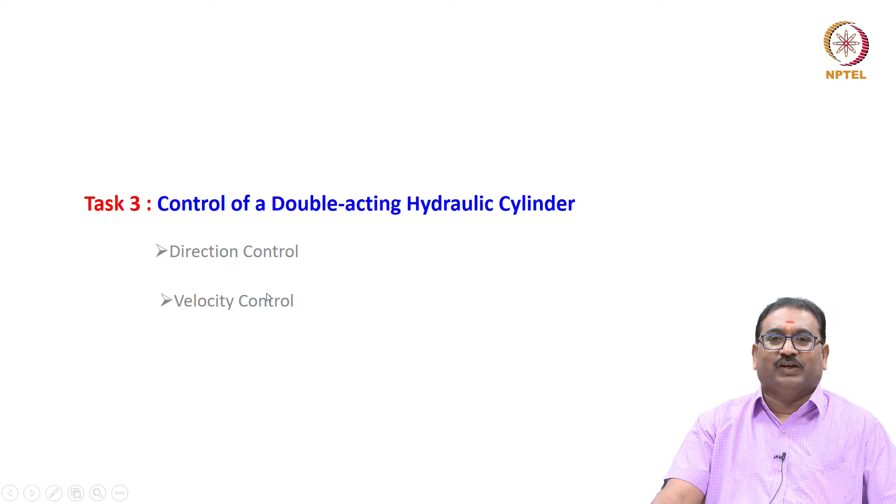Now you are seeing the many ways to control the single acting cylinder direction as well as the speed using the flow control valve and the metering valves. Now we will quickly glance at the double acting cylinder, how to control the direction as well as the velocity.

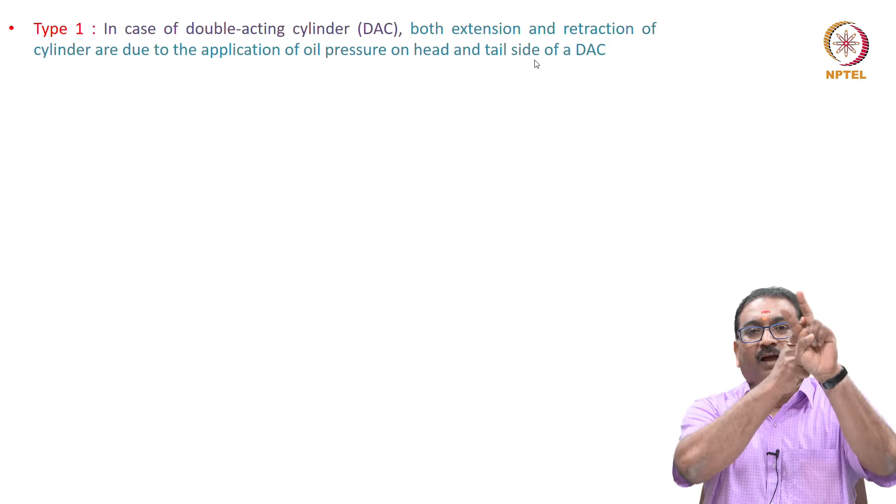Type 1 case. In a double acting cylinder, both extension and retraction are due to the application of oil pressure on the head side and tail side of the DAC. Previously I was using only the head side fluid pressure. Now in the double acting cylinder there are two ports. One port is used as the inlet, the other as the return. Sometimes this is an inlet, this is an outlet, meaning fluid flows in and out through the ports for extension and retraction using fluid pressure.

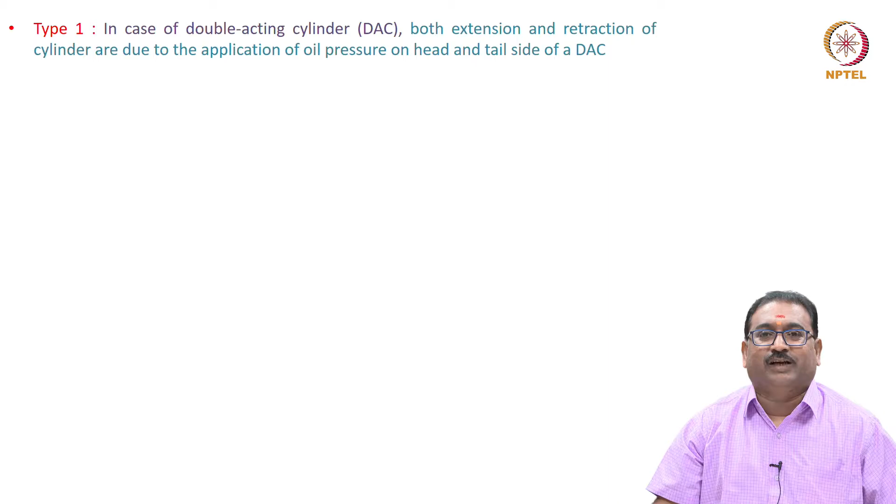Now let us see how the circuit looks. Always draw the circuit in the null position, meaning the cylinder is in the retracted position. You will see the crossed configuration as the null. Here P is connecting to B, meaning the pump flow is coming to the tail side. Whatever fluid is at the head side passes through here and goes to the tank, meaning it is retracting. I am using the 4/2 DCV for this.

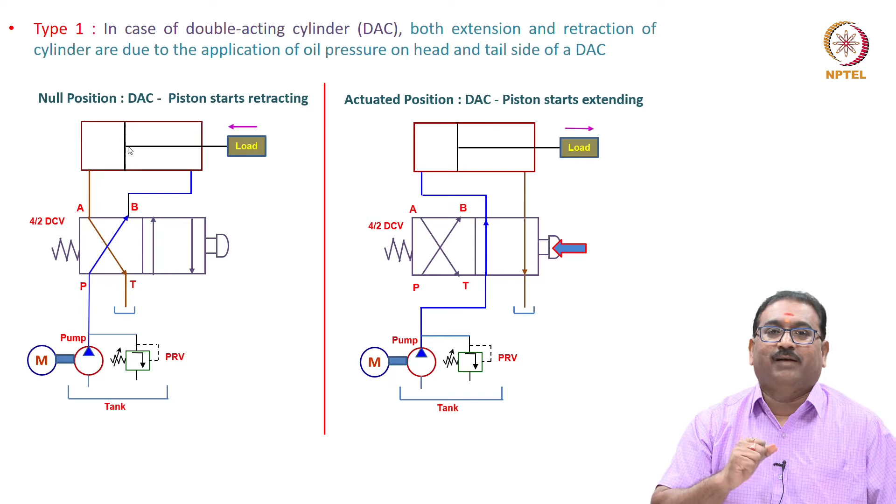Similarly, when you press this, the pump flow connects to the head side. Whatever flow is at the tail side goes to the tank. Very simple. Press again, it shifts to the left position of the DCV, and it retracts again. For every instant of time it will extend or retract. Hold position is not possible here, meaning I cannot stop the actuator at a certain distance using a 4/2 DCV.

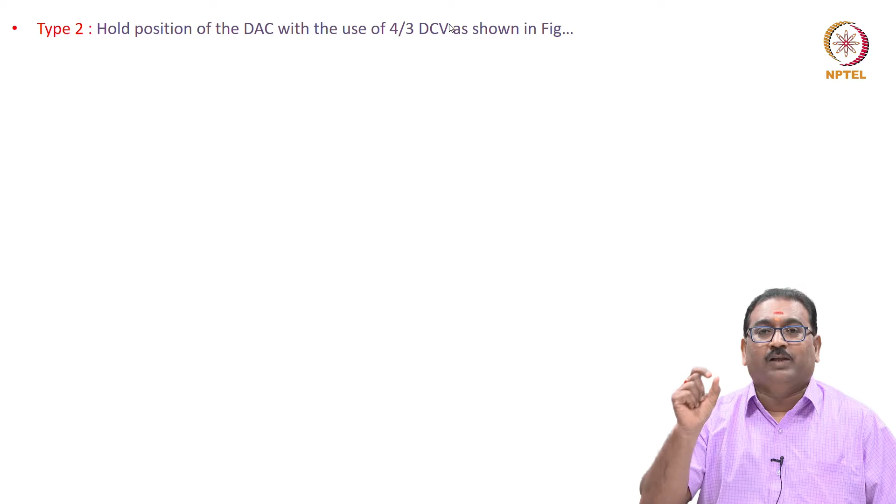How will we achieve this? By using the 4/3 DCV. The middle position plays a major role to hold the actuator in any position. Here I am using the middle position where the A and B ports are blocked, and P is connecting to T, meaning it is a tandem neutral. You have seen the different types of neutrals while studying the direction control valve.

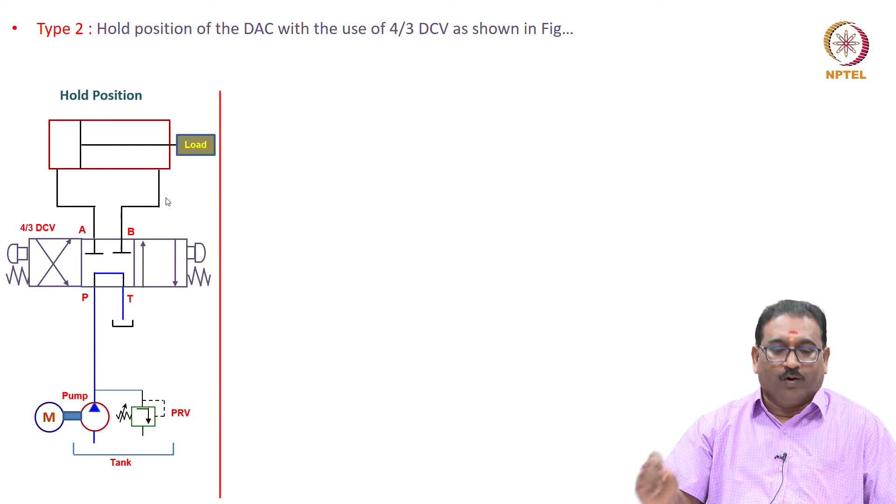Now I want to hold the actuator in any position, for example at 10mm, 20mm, or 30mm if the stroke length is 200mm. In the previous case, using a 4/2 DCV, this is not possible — it will either completely extend or completely retract. Holding the actuator at different positions is only possible with the 4/3 DCV. Now you will see this is the null position.

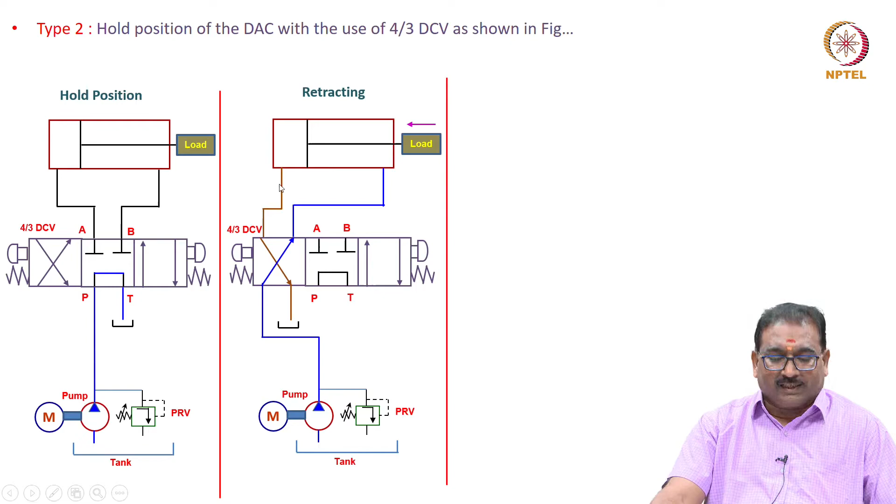This is achieved using two stiff springs. When I operate the left button, the pump flow comes to the tail side, and oil from the head side goes to the tank — it is retracted. For extension, if I press the right actuation button, the pump flow goes to the head side, and flow from the tail side goes to the tank, meaning the cylinder is extending. Once you press it again, make sure it always returns to the middle position.

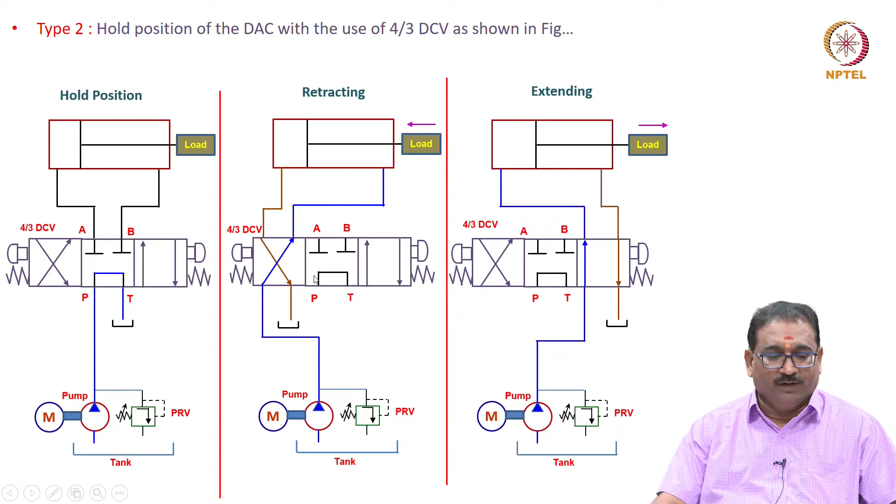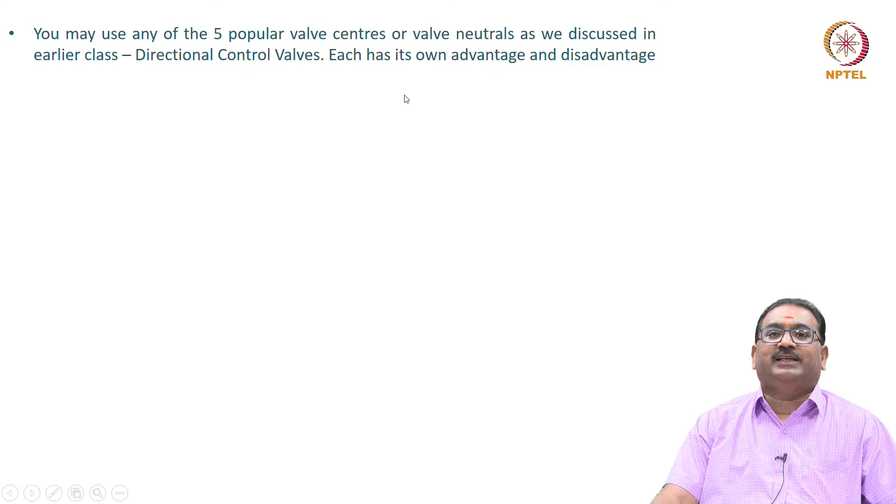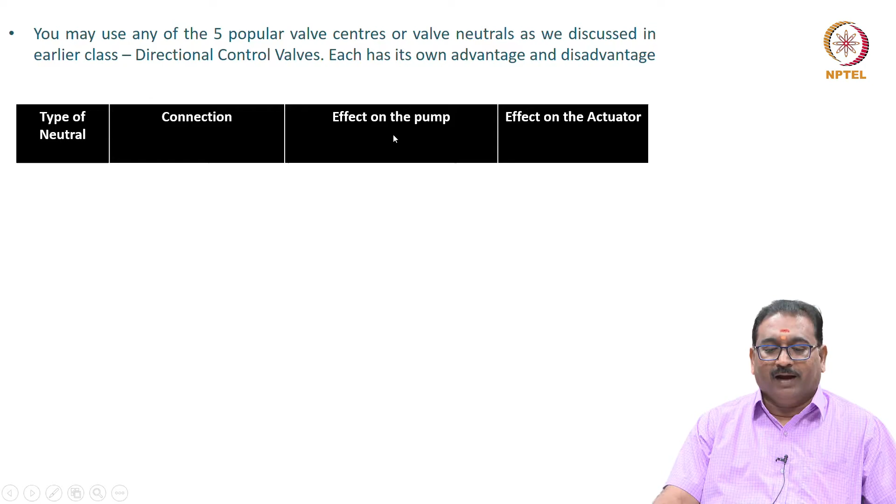You may use any of the 5 popular valve centers, or valve neutrals, as we discussed in the earlier class on directional control valves. Each has its own advantages and disadvantages. I am showing you the different types of neutrals here quickly for your glance — the port connections in the middle, and the effect on the pump and on the actuator in the middle position.

Closed center — the name itself tells us that the pressure port, tank port, A and B ports are all blocked. When this happens, a PRV is a must, because in the middle position the pressure starts building, and hence the PRV is required to divert the flow from the pump to the tank. The actuators are in the hold position.

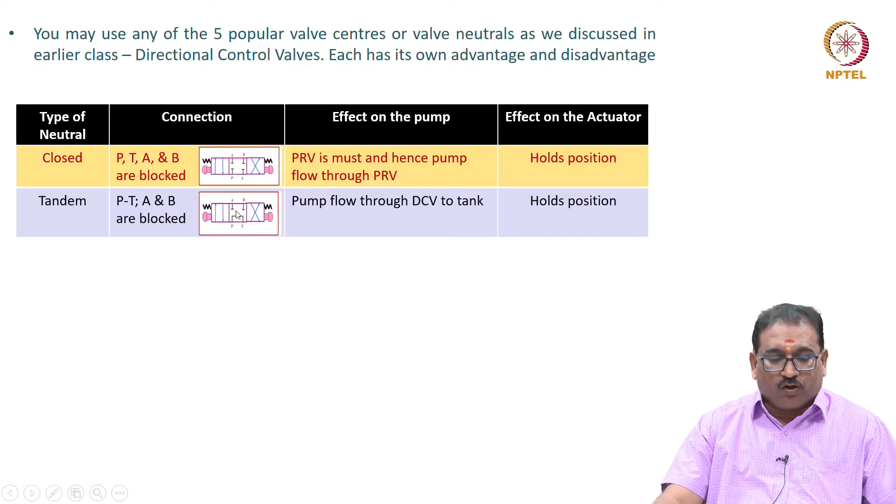In the tandem neutral, P is connecting to T, so pressure will not build in the pump because P is connected to the tank in the middle position. But the actuator ports are blocked, so they remain in the hold position.

In the float center, A and B are connecting to the tank. No need to worry for the actuator. Anytime it will stop in the middle position, both oil will connect to the tank, meaning low pressure, 1 bar pressure. But PRV is required because the pressure port is blocked in the middle position.

One more is there, open center. No need to worry for the actuator and pressure as well as the pump, because all are connected in the middle position. The actuator will float also here, as shown in the floating center.

Regenerative, very important. In the middle position, P, A, B are connected. T is blocked here, meaning regenerative is when I move from one position to another, middle position - what happens? The extra fluid from the rod side is added to the pump and then used along with the pump flow to extend further.

Meaning, what is regenerative? Used fluid is used to increase the velocity of the actuator. That is why the actuator extends quickly but with less force capability, because more flow rate is coming from the pump as well as the return flow, since it is connected here.

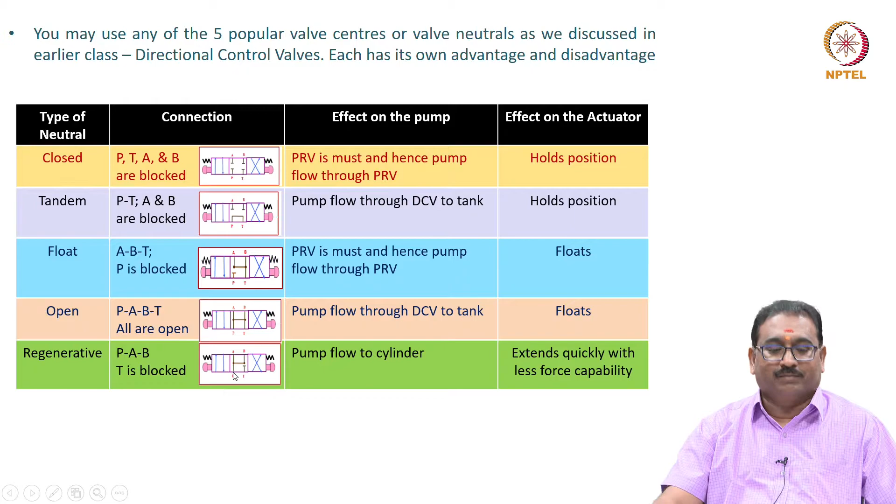Now we have seen in the double acting cylinder how to change direction and hold position using different types of valve centers. Now I want to control the actuator speed either in the forward direction or the return direction. For that, you have to control either the inflow or the outflow. There are many combinations, and I will show you one by one.

Now, controlling the speed of the double acting cylinder by metering the flow into the actuator, meaning a meter-in circuit. Quickly I will show you the circuit in the null position. Here you see a single rod double acting cylinder. Again, I am using the flow control valve to control the inflow at the head side. This is a 4/3 DCV with push button actuation, spring returns to the middle position, and the middle position is the tandem neutral. You may use any type, but for easy understanding I will use the same type of centers in all the slides.

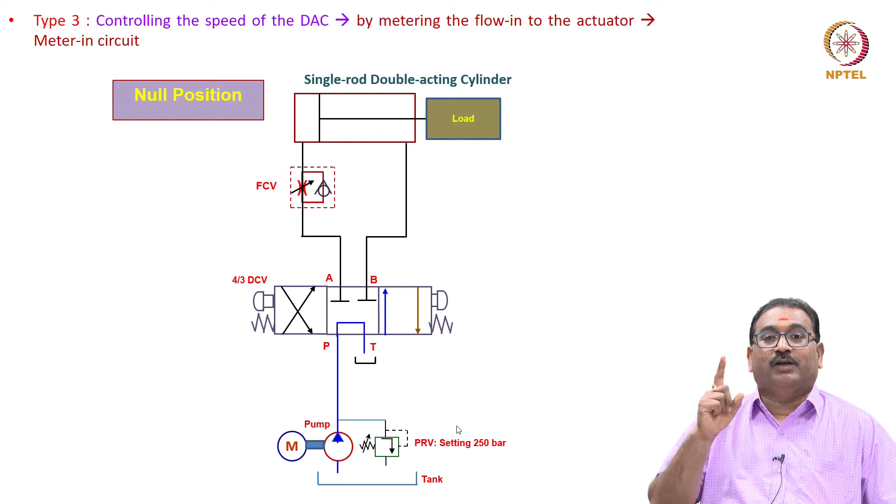The power pack remains the same here. You will see now how it operates. Now I am able to control only the inflow, not the outflow. Now we will see the different actuation positions.

If I operate the right actuation, because I want to extend now from the null position, we will see the pump flow is coming here and going here. It will not pass through the check valve because of its position. It will only pass through the throttle valve, then to the head side, meaning I am controlling the flow into the actuator. Then it moves with the required velocity.

Then when you actuate the left side push button, the pump flow comes here and goes to the rod end, pushing whatever fluid is at the head side out. The check valve opens, then it goes to the tank, meaning the outflow is not controlled in the return direction.

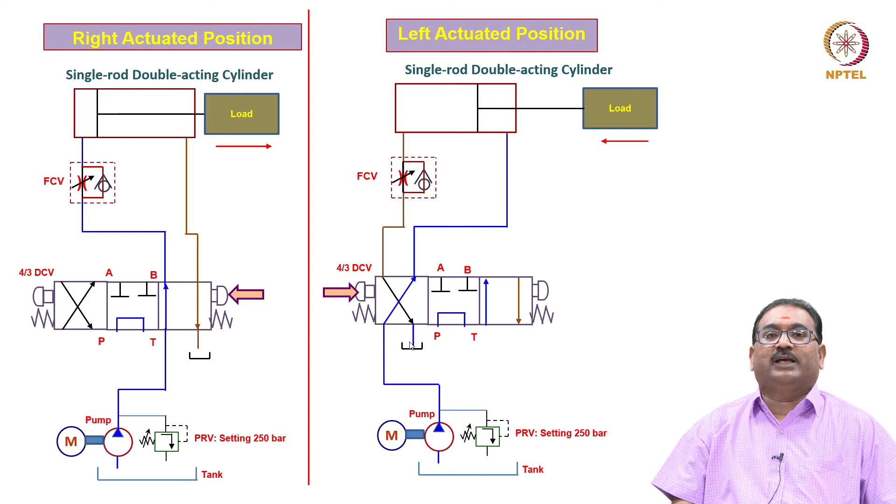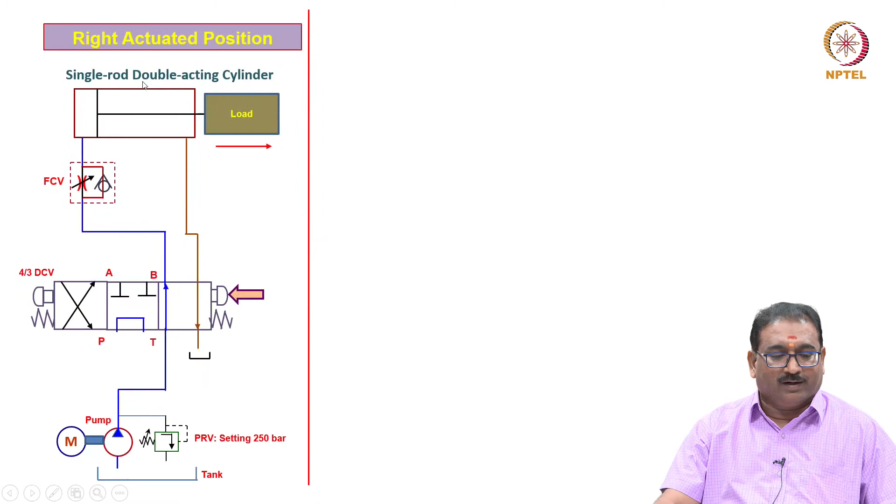So I am controlling only the inflow to the actuator during extension. Such circuits are known as meter-in circuits. Now we will see one more case - type 3 is over, this is type 4, I will show you.

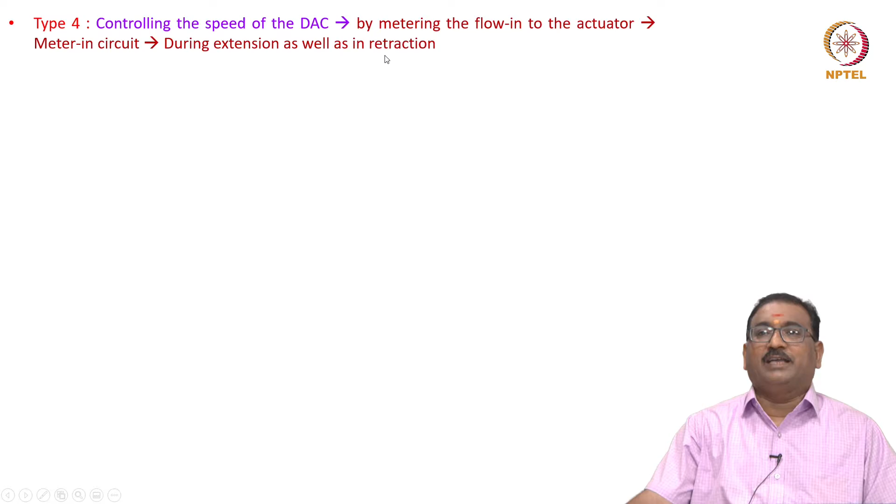Now we move on to controlling the double acting cylinder by metering the flow into the actuator - meter-in circuit - during both extension and retraction. As always, in the null condition, this is the circuit.

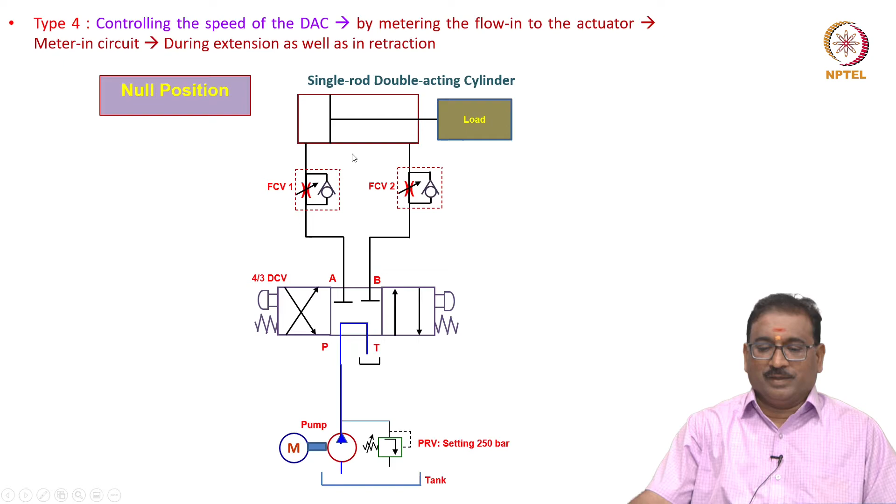When I press the right side button of the DCV, the flow from the pump goes to the head side through the metered orifice, and the piston starts moving to the right side.

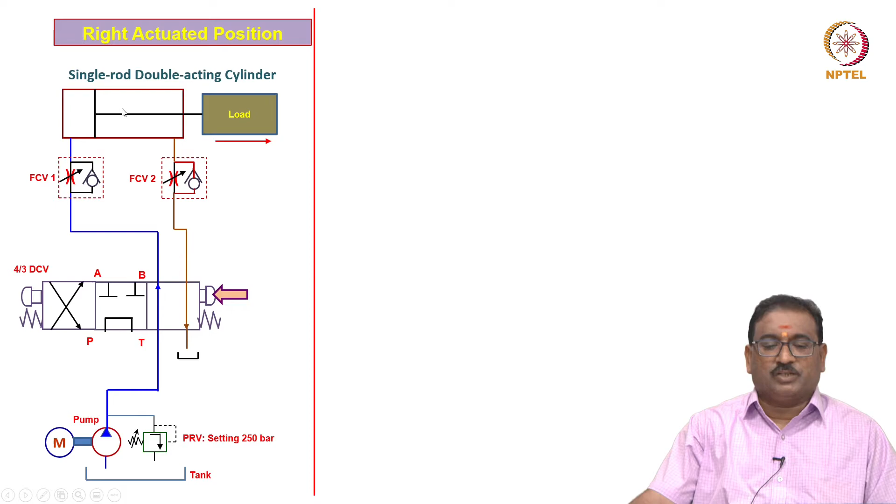When you press the left side of the DCV, what happens? It jumps to the crossed configuration. The pump flow goes to the tail end or rod end, again through the metered orifice, meaning in both conditions the flow entering the actuator is controlled, and the flow at the head side is bypassed through the check valve.

Correct, in both cases, whether you operate the right actuation or the left actuation, only the metered inflow is controlled and the outflow is bypassed through the check valve.

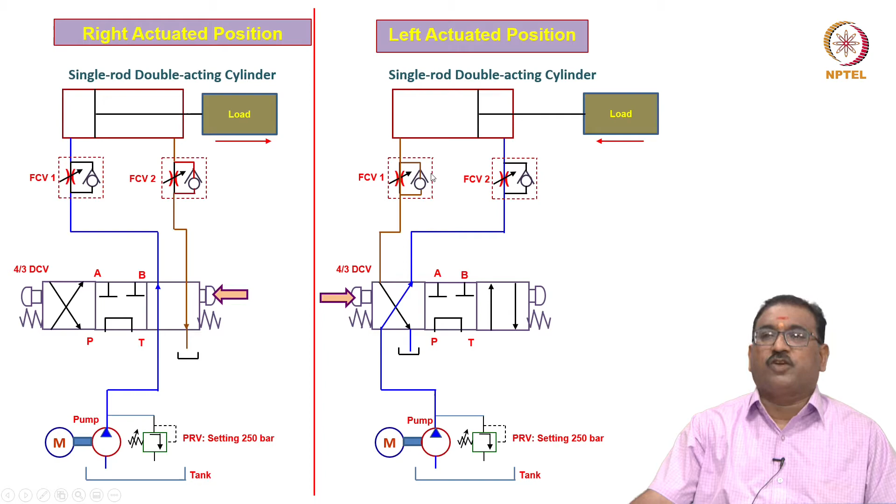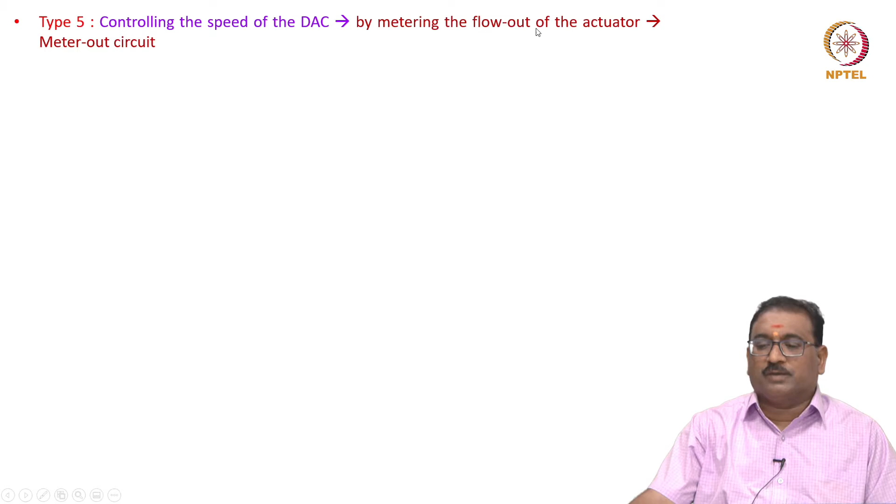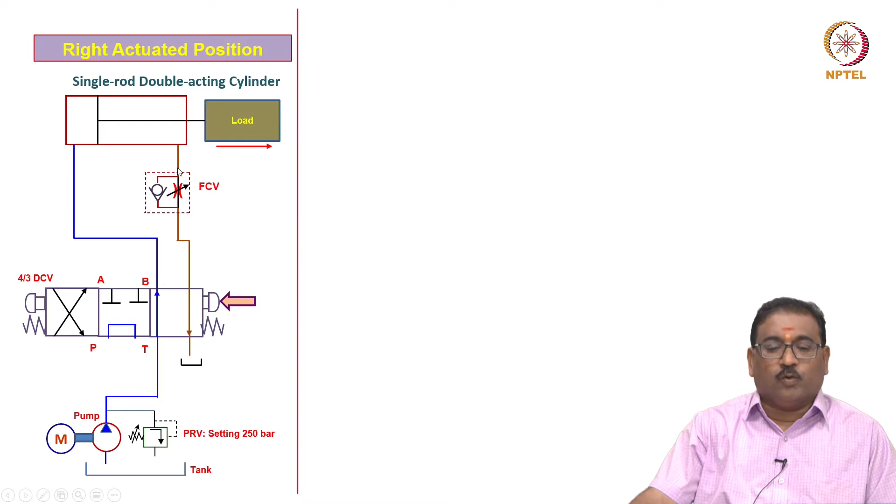Now we will see again type 5, controlling the speed of the double acting cylinder by metering the flow out of the actuator. This is a meter out circuit. The null condition looks the same, but I am placing the flow control valve at the tail end, meaning the rod side. Now actuated position right side, the pump flow is exposed to the head side, the tail end is only controlled through the orifice.

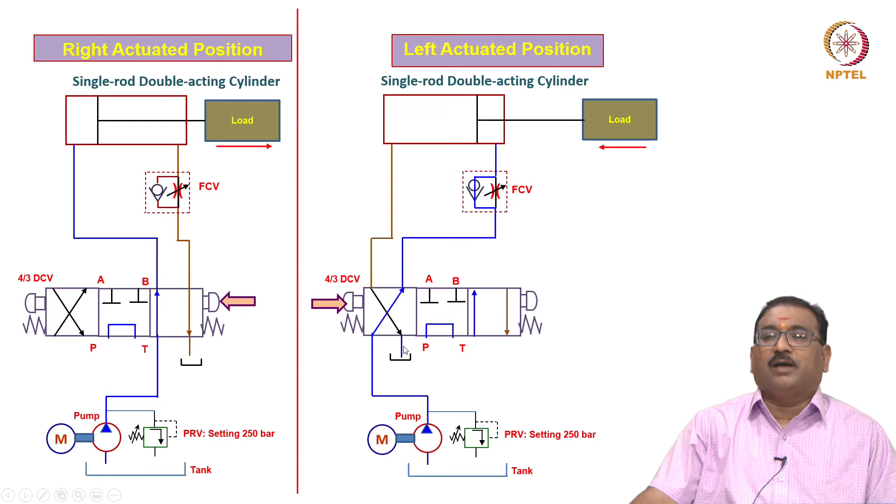When you press the left hand side of the DCV, the pump flow comes to the tail side, meaning rod end, through the bypassing check valve, and the flow from the head side goes to the tank directly.

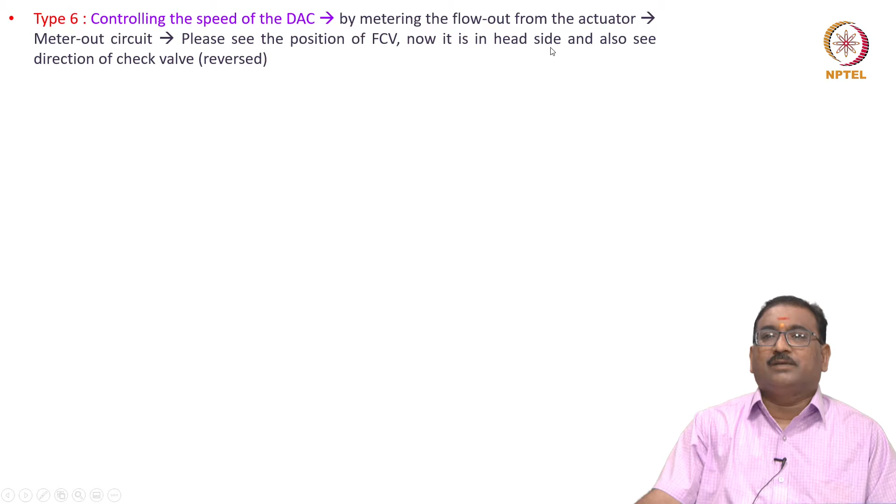Now type 6, controlling the speed of the double acting cylinder by metering the flow out from the actuator. Again we will draw the meter out circuit, but see the position of the FCV how I placed it. Now it is on the head side, and also see the direction of the check valve. Now we will see how it operates.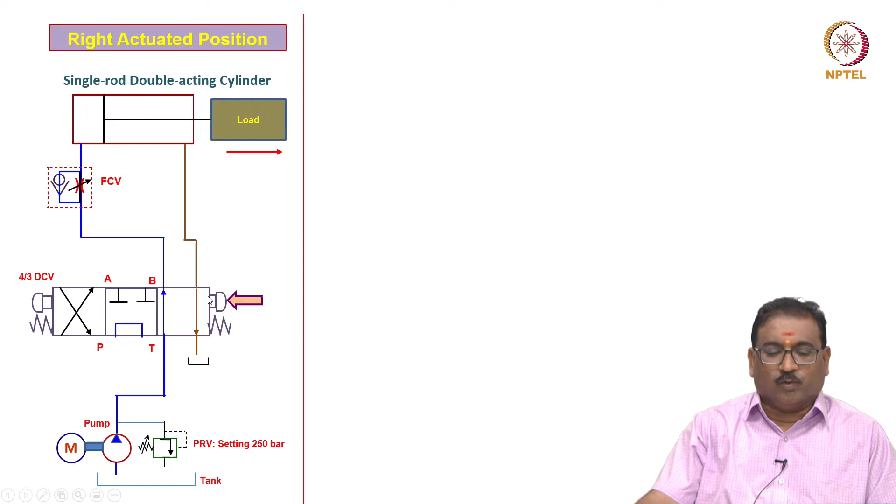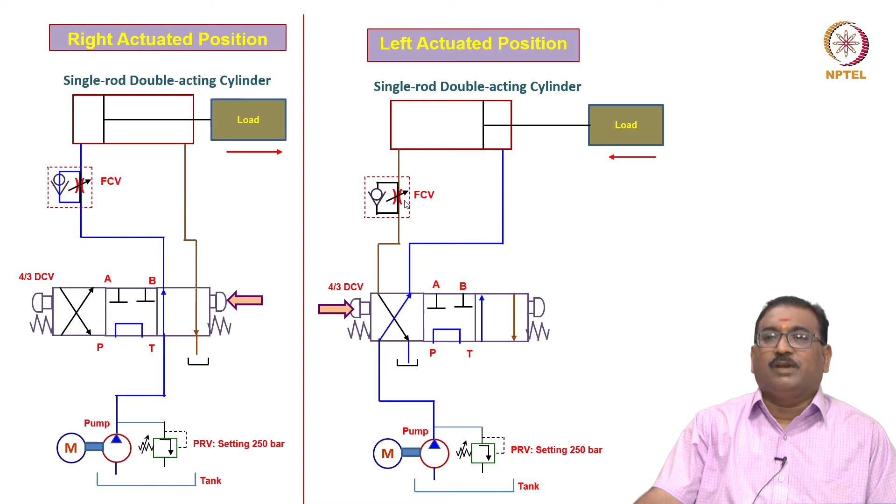Now when we press the left side of the DCV, the flow comes to the tail side as free flow, whatever pump flow is coming here, and the actuator moves to the left side. Then the flow exiting at the head side will pass through the metered orifice, meaning the outflow is controlled. This is similar to the previous one, but here I placed the FCV at the head side, controlling the outflow only.

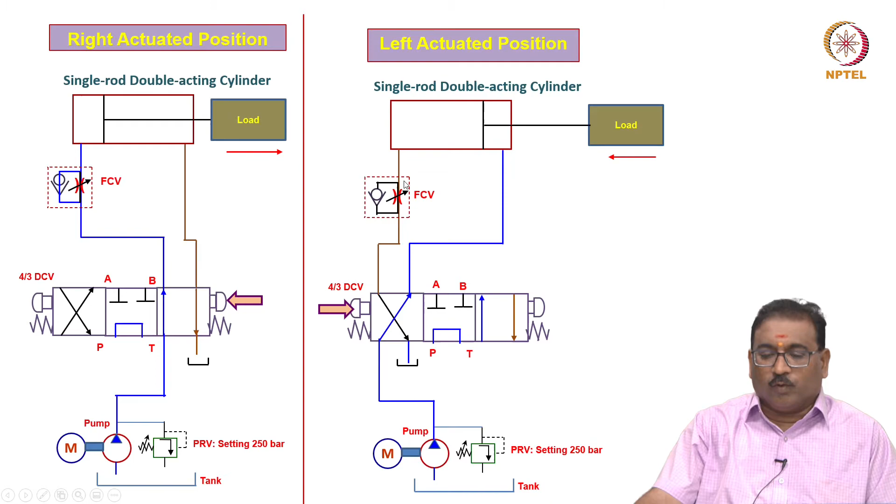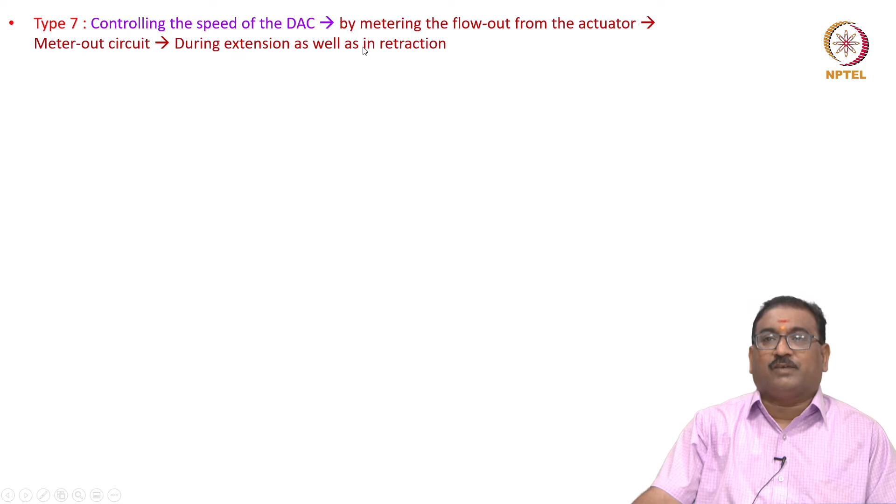Now we will see type 7, how we control the double acting cylinder by metering the flow out from the actuator, again meter out during extension as well as retraction. How do we do this? As we already know, I am using two flow control valves, one at the head side and one at the tail side.

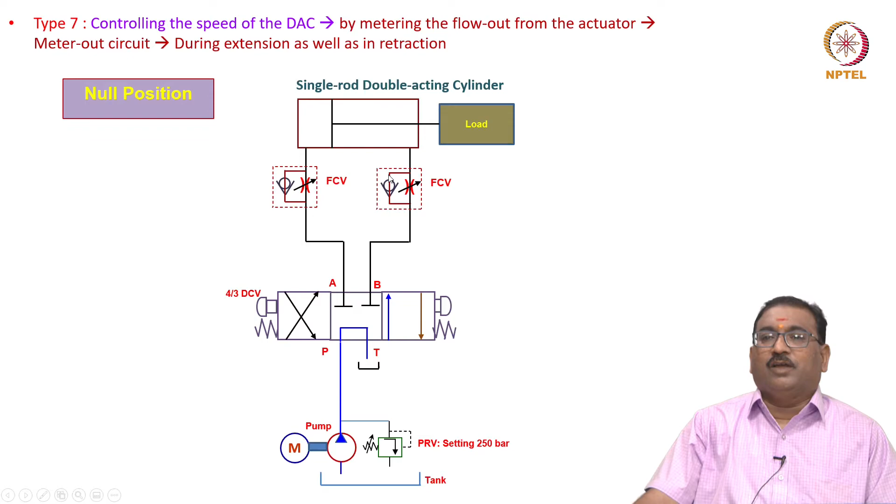Now let's see by operation when I press the right side actuation how the flow takes place. From the pump it goes to the head side with no control, because it is bypassed through the check valve. When the piston moves to extend, the flow is only passed through the metered orifice. So speed is controlled here, outflow is controlled here.

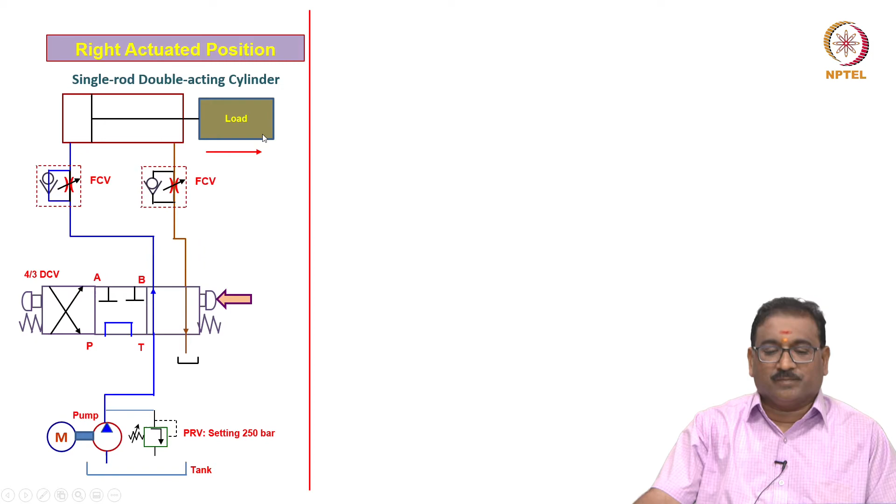Now we press the left side button. What happens? The pump flow is coming to the tail side, bypassed through the check valve. Whatever flow is there in the head side will pass through the metered orifice. Again the speed is controlled both on the forward as well as the return side.

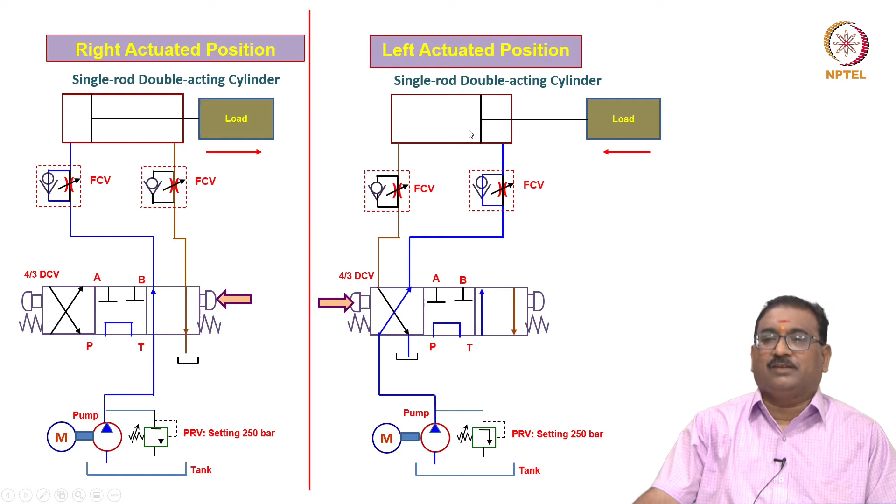Now let us see very quickly, friends, regenerative circuits. Regenerative circuits are very much essential when we are supporting the pump flow during the extension, and how we are placing the valves.

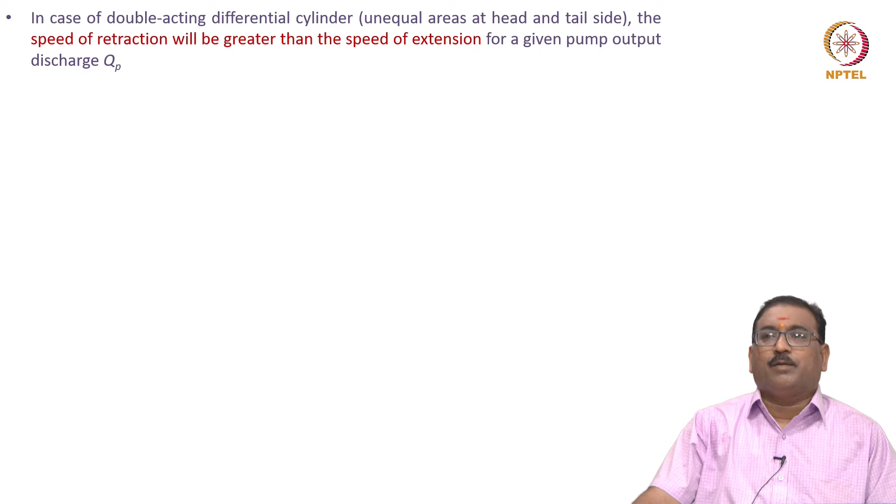Now we will see, in case of the double acting differential cylinder, meaning unequal areas at the head and tail side, the speed of retraction will be greater than the speed of extension for a given pump output discharge QP.

This is because the effective area of the piston surface is smaller on the rod end side than the cap end.

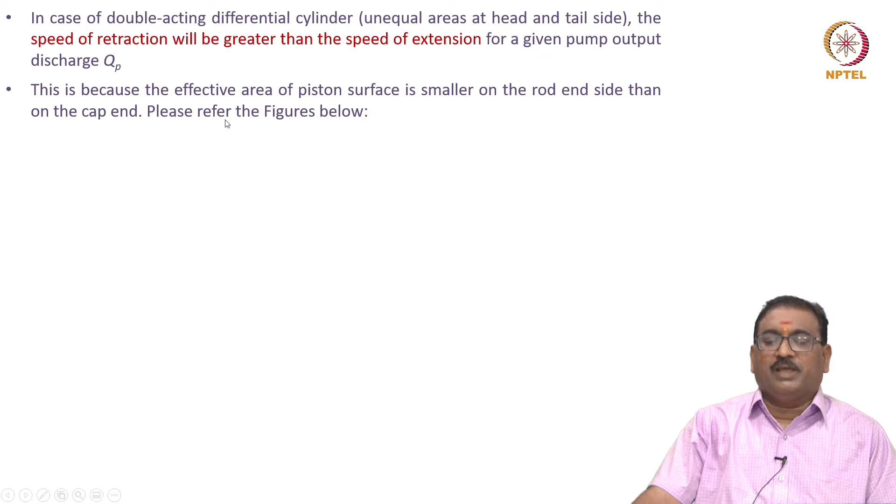Please refer to the figure below, I am showing you the differential area. When the fluid is coming to the head side, this is the effective area, the piston area pi by 4 dP square, during the forward direction. During retraction, the effective area the fluid is exposed to is the rod area, so you have to subtract it, meaning pi by 4 dP square minus dr square.

During extension, the complete pump flow divided by the area of the piston gives the extension velocity. During retraction, the complete pump flow divided by the effective area AR, which is pi by 4 dP square minus dr square, gives the retraction velocity.

Please note, friends, areas are like this: AP is greater than AR. So the velocity of retraction is more than the velocity of extension.

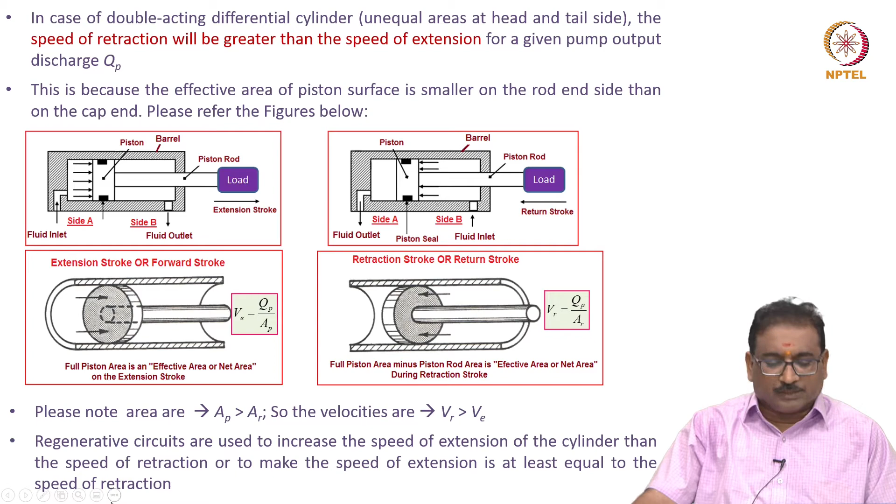Regenerative circuits are used to increase the speed of extension of the cylinder compared to the speed of retraction, or to make the speed of extension at least equal to the speed of retraction. To increase the speed of extension, the discharge flow from the rod end is passed to the head side instead of sending it back to the tank.

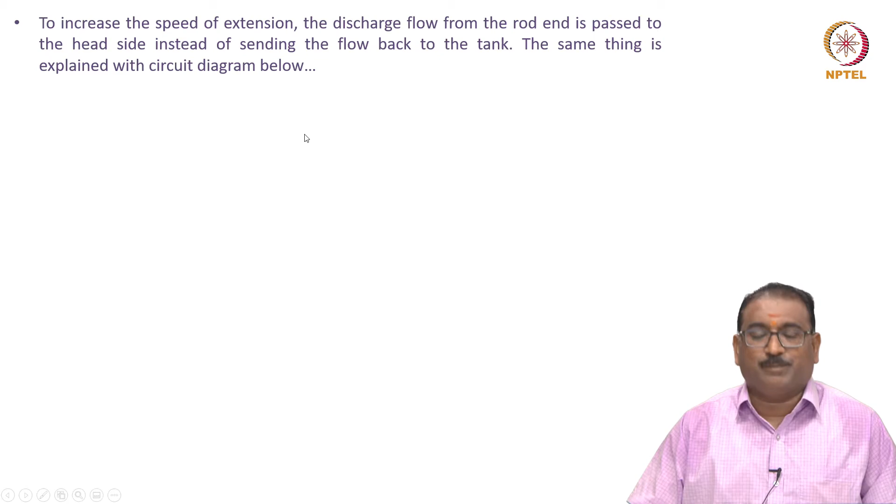The same thing is explained with the circuit diagram below. Let us consider the circuit: this is a double acting cylinder connected to the DCV, a 4/3 DCV with closed center.

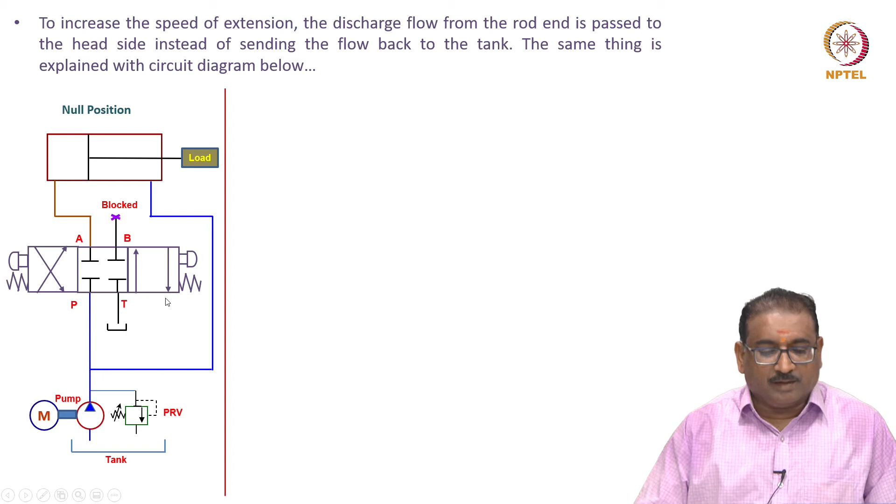Here pump is connected to the middle position and A port is connected to the head side. B is blocked here. Then B of the double acting cylinder is connected directly to the pump line here.

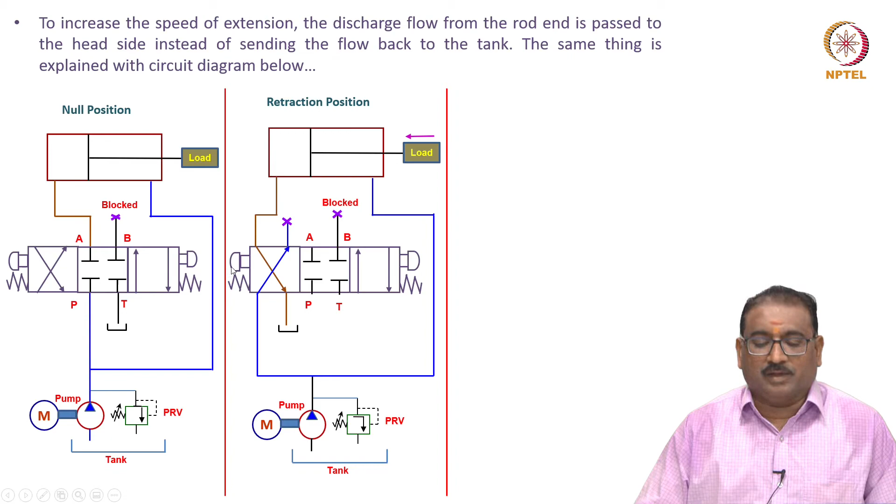Now let us see what happens in the actuated position. When I operate the left side DCV push button, the pump flow is coming here and it will block here, but it will go to the tail side of the double acting cylinder through this. Then the piston is retracting.

Whatever fluid is there will go here and then to the tank. When you actuate the right push button, you will see the pump line will come here, and it will go to the head side.

Now, when the piston starts moving, whatever fluid is there at the rod end will come here and then join the pump line. See here friends, it adds here. Then what happens? Extension speed will be increased because of the pump flow plus the flow from the rod end.

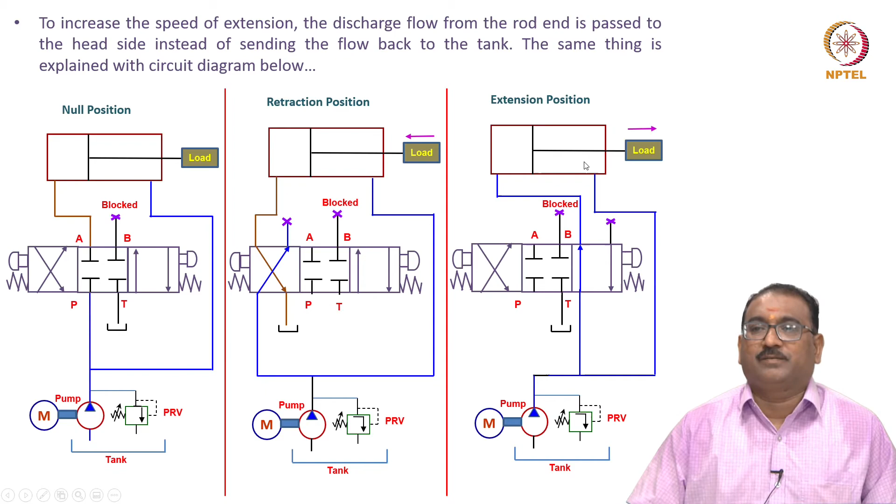This I will explain to you, how to mathematically calculate this regeneration. The equation for the extending speed can be obtained as follows.

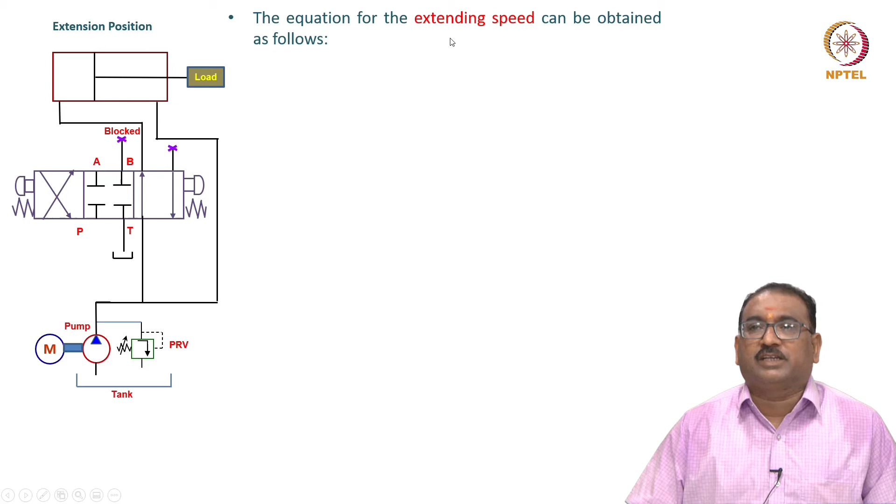As we already know, the total flow rate entering the blank end of the cylinder equals the pump flow rate plus the regenerative flow rate coming from the rod end of the cylinder. So Q total equals what? QP, pump flow, plus flow from the rod end, QR.

Solving for the pump flow, QP equals what? QP equals QT minus QR. So we know that the total flow rate equals the piston area multiplied by the extension speed of the piston.

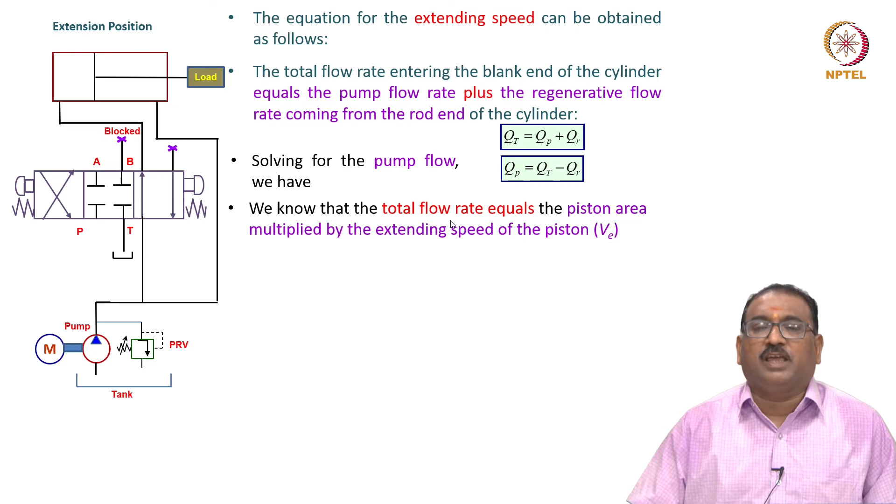Meaning Q equals A into V, correct friends? Similarly, the regenerative flow rate equals the difference of the piston and rod area, meaning AP minus AR, multiplied by the extension speed of the piston.

Substituting these two relationships into the preceding equations yields QP equals what? AP into VE minus AP minus AR into VE, correct?

Now what will we do? You will open the bracket here, then you will get QP equals, because this AP VE gets cancelled, we will get only QP equals AR into VE.

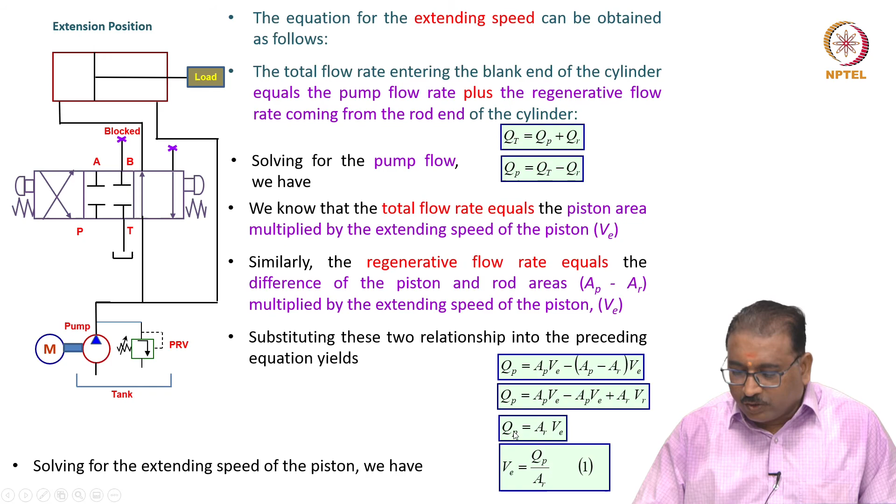See friends, solving for the extending speed of the piston, we have VE equals QP by AR. Let us call this equation number 1.

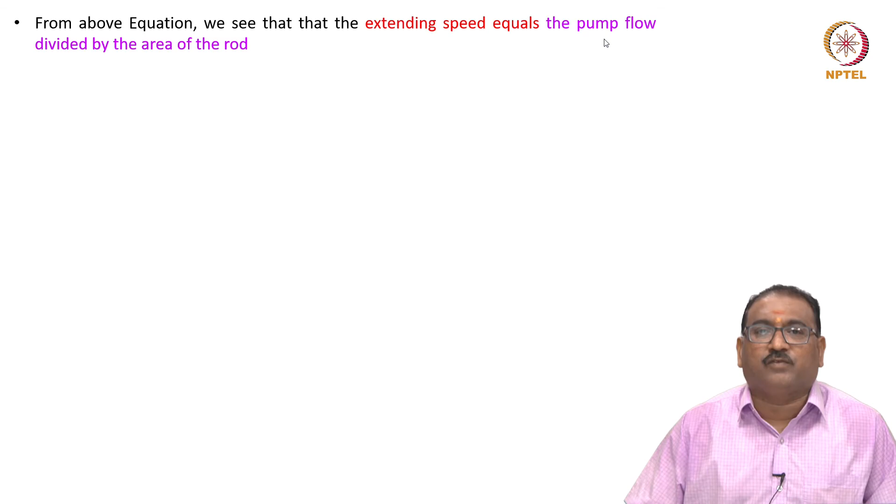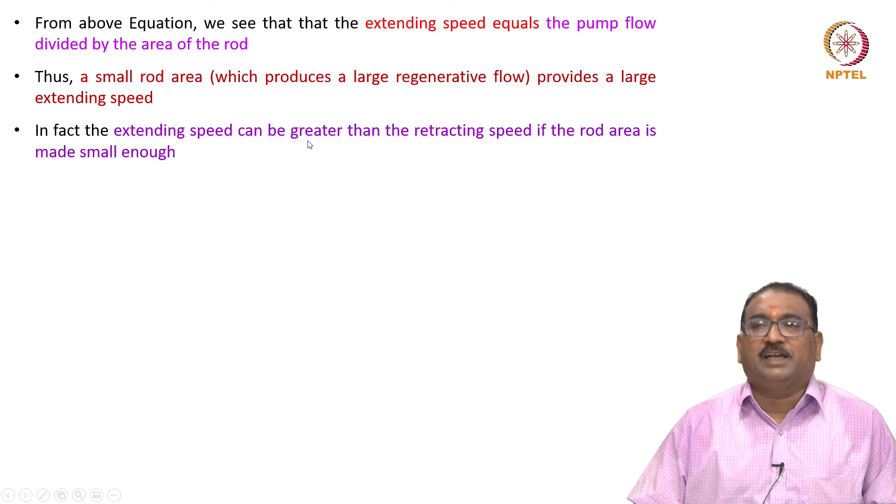From the equation, we can see that the extending speed equals the pump flow divided by the area of the rod. Thus, a small rod area which produces a large regenerative flow provides a large extending speed. In fact, the extending speed can be greater than the retraction speed if the rod area is made small enough.

Let us find the ratio of extending and retracting speeds to determine under what condition the extending and retracting speeds are equal. Let us see now.

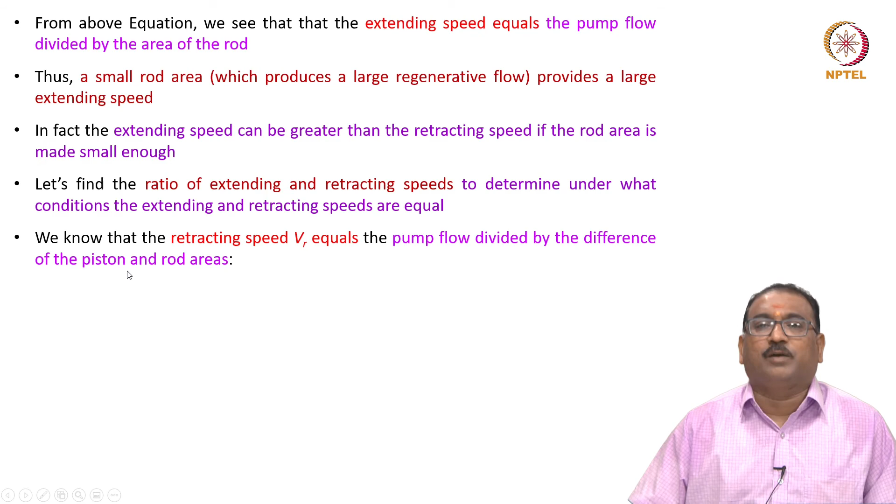We know that the retraction speed VR equals the pump flow divided by the difference of the piston and rod areas. Already we know VR equals QP by AP minus AR. Let us call this equation number 2.

Now we have to take the speed ratio. Already we know velocity for extension and velocity for retraction, QP by AR and QP by AP minus AR. Then QP gets cancelled, then this term will go up, AP minus AR by AR.

So upon further simplification, we obtain the desired equation as the ratio of velocity of extension to the velocity of retraction, AP by AR minus 1. Call this equation number 3.

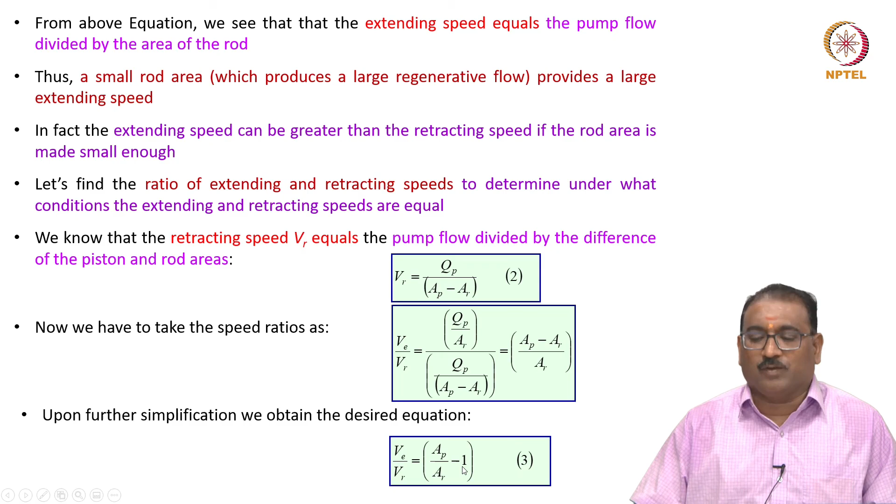From the above equation 3, we can see that when the piston area equals 2 times the rod area, then the extension and retraction speeds are equal.

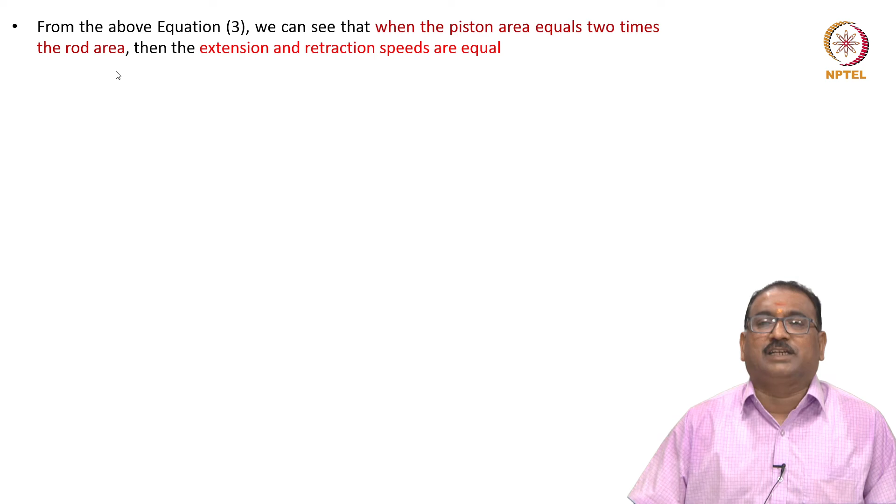In general, what happens friends, the greater the ratio of piston area to rod area, the greater the ratio of extending speed to retracting speed.

It should be kept in mind that the load carrying capacity of a regenerative cylinder during extension is less than that obtained from the regular double acting cylinder.

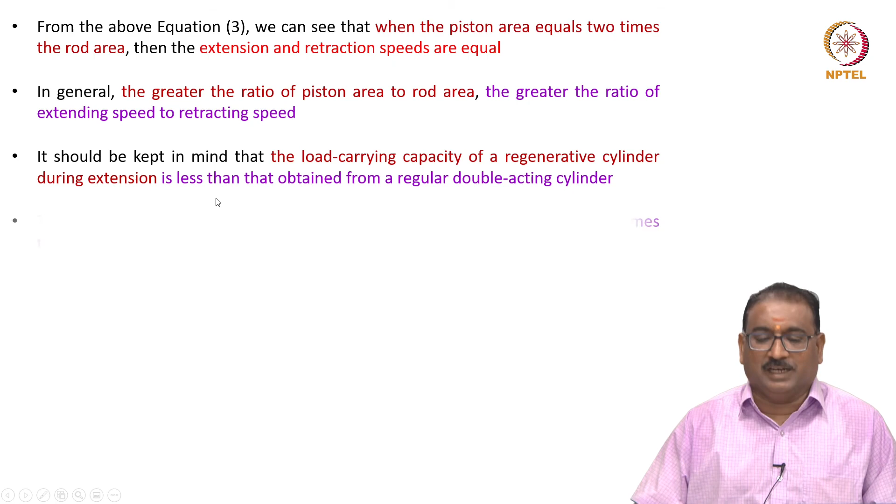So the load carrying capacity for a regenerative cylinder equals the pressure times the piston rod area rather than the pressure times the piston area.

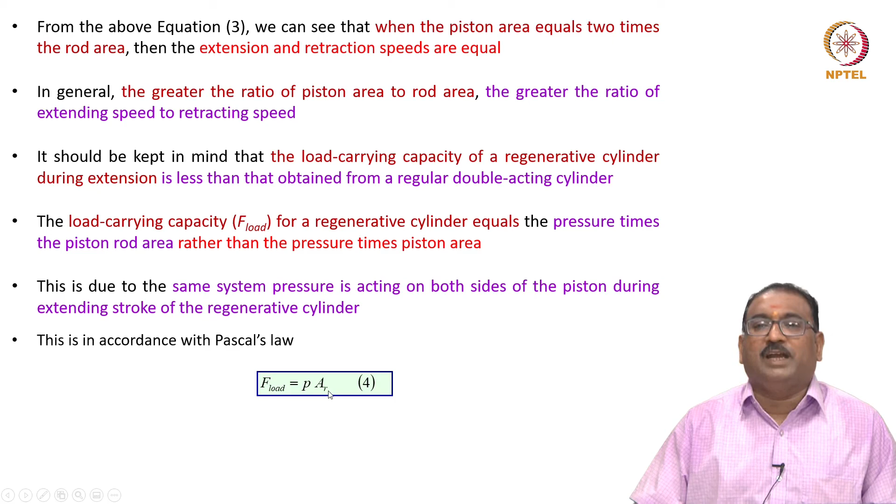This is due to the same system pressure acting on both sides of the piston during the extending stroke of the regenerative cylinder. This is in accordance with Pascal's law, F load equals P into AR. Please note friends, call this equation number 4.

Thus, we are not obtaining more power from the regenerative cylinder, because the extending speed is increased at the expense of load carrying capacity.